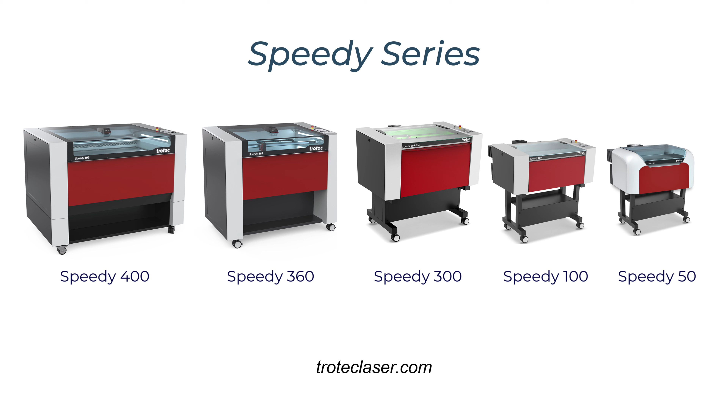This video will showcase 3 projects for the first-time operation of your Speedy laser systems. Project number 1 will create a simple design from start to finish directly in the Ruby software. Project number 2 will use free online design generators and image artwork combined in Ruby to create a fun, unique laser project. Project number 3 will use a design created in a third-party graphic design software to then open into Ruby and then laser process that design.

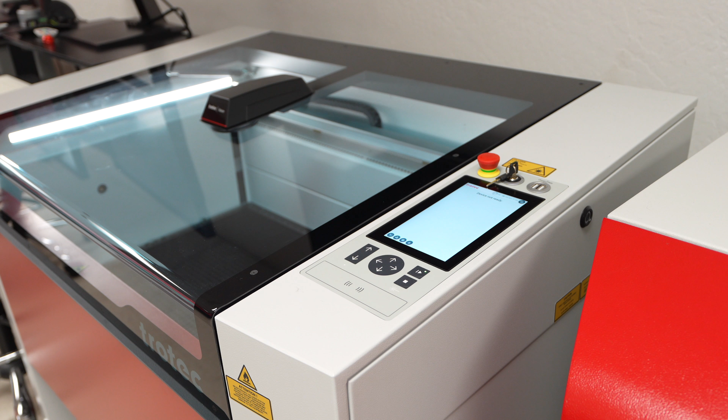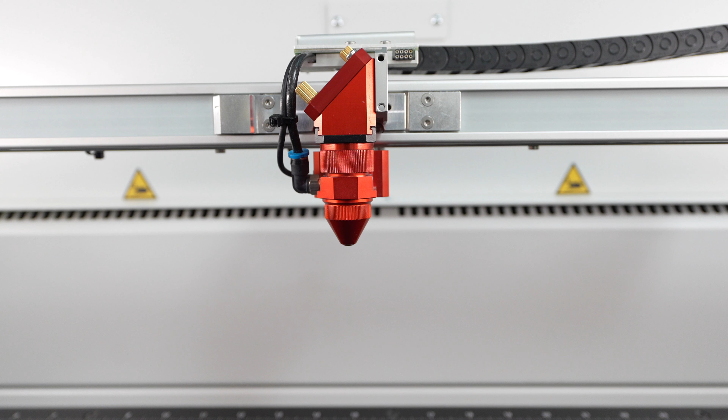First, approach your new laser machine, turn it on with the key or switch, and let it boot up and home. Use the arrow keys to move the laser focus head out to the center of the field. For the Speedy 300, 360, and 400, remove the small hole nozzle and replace that with the wide hole nozzle by unscrewing it to remove it and then screwing the new one in place. For the Speedy 100 and Speedy 50, this step is not necessary.

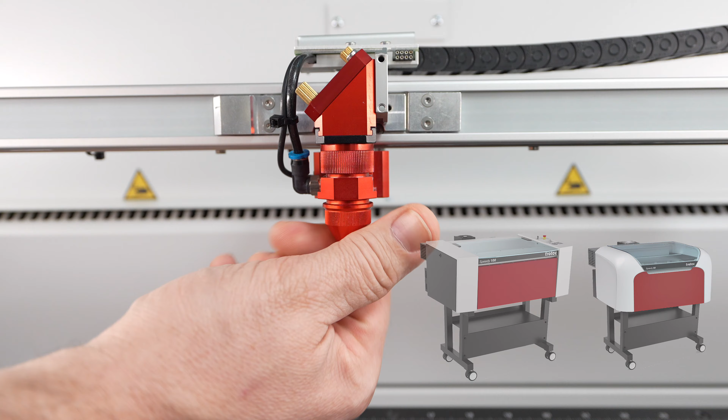The large hole nozzle is ideal for shallow surface engraving on plastics and acrylics, producing a flame-polished edge due to slower cooling of the material. The small hole nozzle is designed for cutting operations like wood that generate a lot of smoke, focusing the airflow to clear away smoke and gases. It is also suitable for engraving applications that produce dust and will be the default nozzle for most applications.

This first project will create a design directly in the provided Ruby software using a sheet of blue on white TroLase plastic shown here.

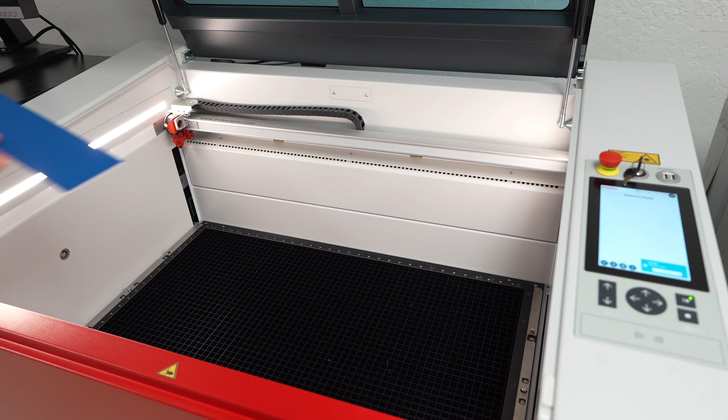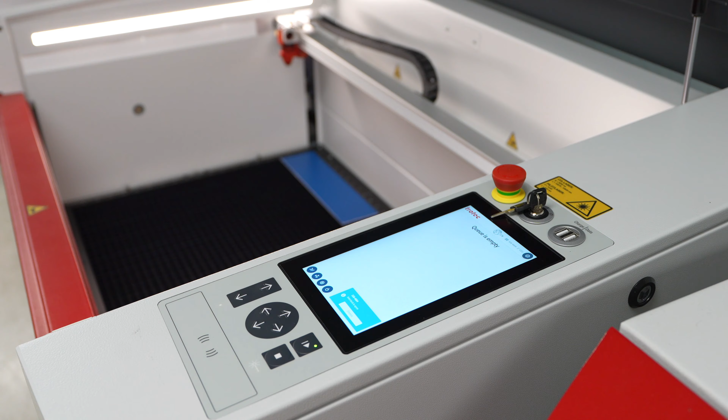Remove the protective film from a piece of this plastic, open the laser system, and place the plastic into the upper left side corner of the machine. Now, on the Speedy 360 and Speedy 400 machines, use the system arrow keys to move the laser head over this plastic. Then select both the up and down Z-axis arrow keys simultaneously to use the sonar autofocus to focus the laser system on the plastic.

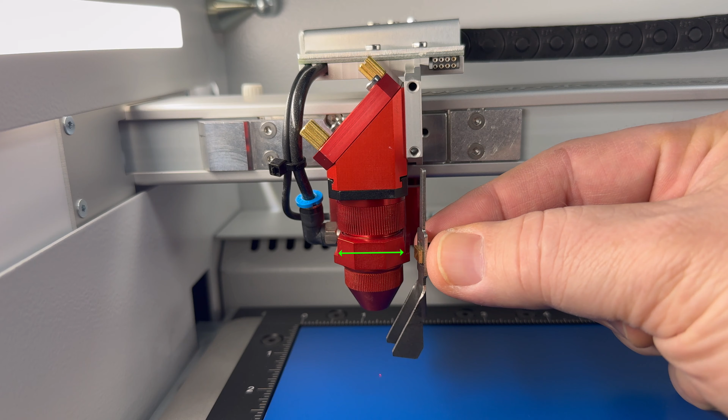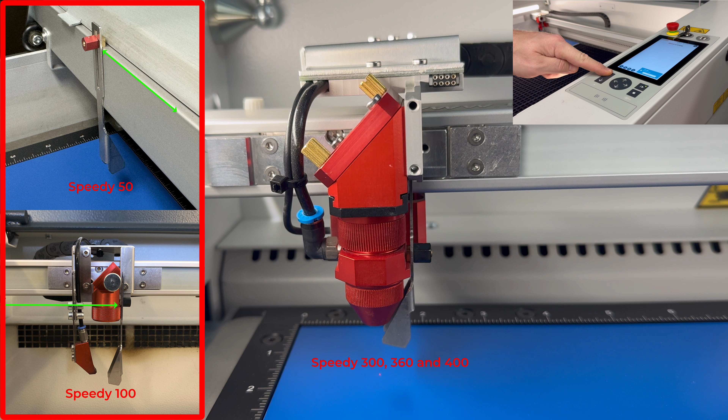Additionally, all Speedy machines can be manually focused using the provided focus tools. To do this, place the focus tool onto the left or right side of the focus head on the Speedy 300, 360, and 400 machines. The Speedy 50 and 100 are similar, as shown in the photos. Then, use the system Z-axis arrow keys to manually adjust the laser table height until the focus tool gently touches the material and slightly moves. Then remove the manual focus tool, and the system is focused on the material.

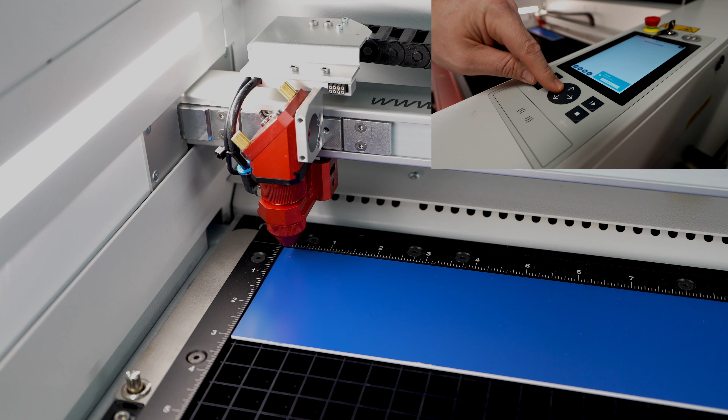Now, use the onboard arrow keys on the Speedy 100, 300, 360, and 400, and the computer keyboard arrow keys on the Speedy 50 to move the focus head to the desired start location on the material. Make sure to start the laser job slightly offset from the very edge of the material to produce a clean-cut part.

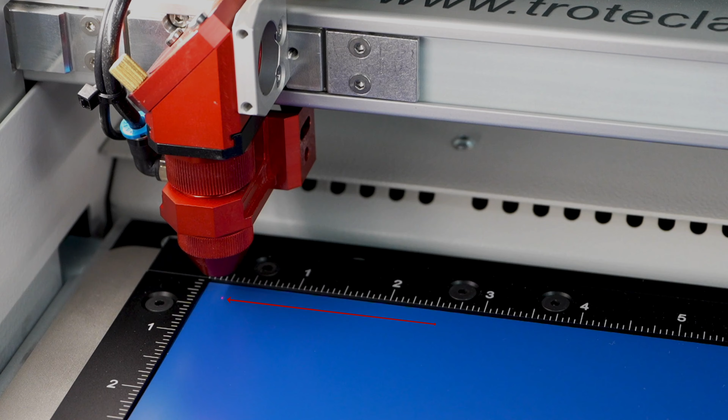Open the Ruby software on your computer system, tablet, or laptop. Select the second icon on the screen's top center to open the Ruby design screen. We will be creating an engraved and cut out nameplate in this example. In the design screen, select the rectangle tool and then drag out a rectangle.

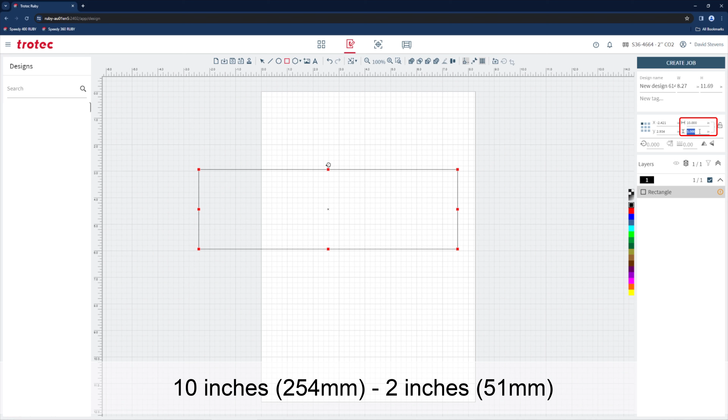On the right side, near the drawing dimensions, select the small lock icon to unlock the X and Y aspect ratio. In the drawing dimensions field, type 10 inches or 254 millimeters in the X dimension and 2 inches or 51 millimeters in the Y dimension to create a nameplate outline. Then select red on the color palette. This will change the size and color of the rectangle. Colors are used for a laser operation. A red line is the default color for a laser cut path.

Select the Fit to Design button on the top toolbar to resize the page to match this design. Select the small letter A on the top toolbar to add text to this design. Type out your name or desired text to be placed inside this rectangle. Click the selection tool on the top toolbar. Then, select a corner of this text and drag it out until you reach the desired size. While the text is selected, click the color black on the color palette to convert the text to black. The black color is the default color for engraving.

Now, select the text and move it towards the center of the rectangle until it automatically snaps to the center. Once satisfied with the design, select the Create Job button on the upper right side of the screen. This will bring this design into the Prepare screen.

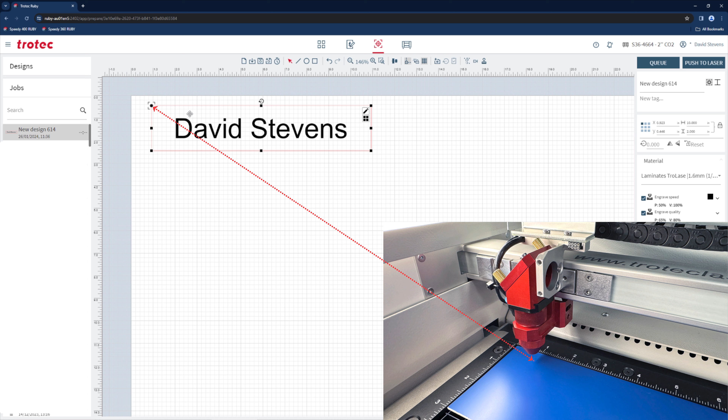On the Prepare screen, a small crosshair square icon will be seen on this field if the machine is turned on. This is a live reference of the exact location of the laser machine's red pointer that was positioned earlier. Select the nameplate design, move it, and snap the upper left corner to this cursor, representing the location of the laser red pointer.

If you have a Speedy 360 or a Speedy 400 system, you can turn on the Vision Design and Position Camera system by selecting the camera icon button and using the camera to position the graphic. This is in addition to using the red pointer. Select here to turn off the grid for a clearer image, then use the camera image to position the design onto the plastic.

Next, select the material that will be laser processed. This example will be laminates, TroLase, 1.6 mm or 1/16 of an inch. Once the material is selected, click the Push to Laser button on the top right side of the screen. This will send the design file that was just created, positioned on the field with the selected material parameter, to the Produce screen, also known as the queue of ready to process laser files.

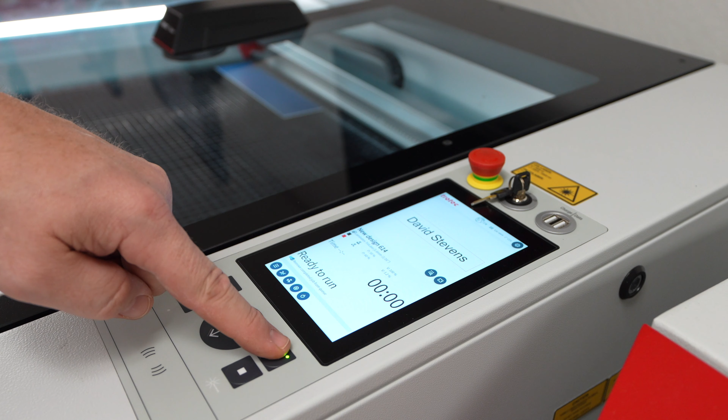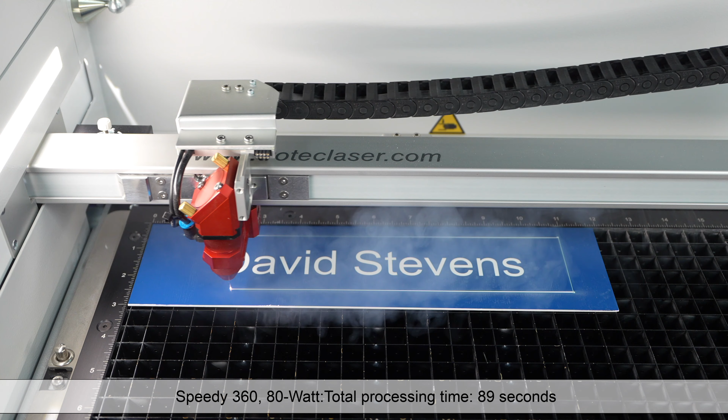Select the Start button on the laser machine and watch the laser automatically engrave the black text shown here in a time lapse. Then cut the plastic with the red line. The actual processing time on a Speedy 360 80-watt laser was completed in 89 seconds. Open the laser and use a cloth to wipe away any dust. Then remove the completed nameplate from the laser.

For the second project, we will process a solid wood sheet. Because thicker woods produce more heat and debris, the more commonly used higher pressure small hole nozzle is needed. Remove the wide hole nozzle and reinstall the small hole nozzle by unscrewing one and screwing on the other. This step is not needed on the Speedy 50 and Speedy 100 systems, as the air comes in from the side, and these models do not use nozzles.

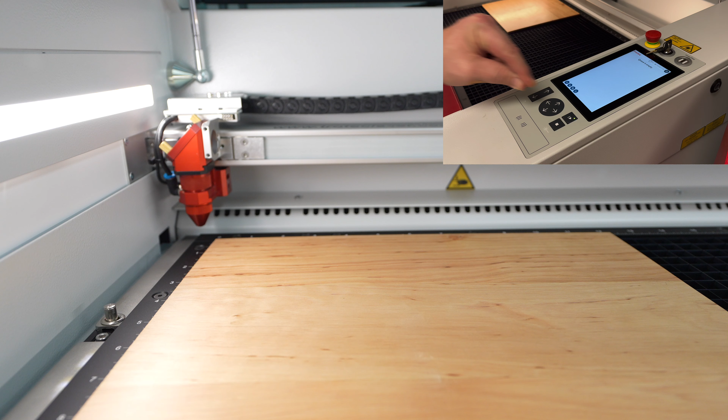Place the wood into the laser machine's upper left corner and again, focus the laser using the sonar focus or the manual focus tool, depending on the Speedy laser machine you are using. Please note that anytime a new material thickness is used, the laser will require it to be refocused to maintain quality. Once focused, close the laser lid and open up the Ruby software.

For this project, I will create the design online by first going to makerdesignlab.com, then clicking on Tutorials and Tips, then selecting Online File Generators for Laser Cutting, and then scrolling down past many other useful online laser generators that can be used on your laser system. Generators for creating boxes, templates, gears, mazes, rulers, and nesting, until you see the Jigsaw Puzzle Generator. Select this generator and open it.

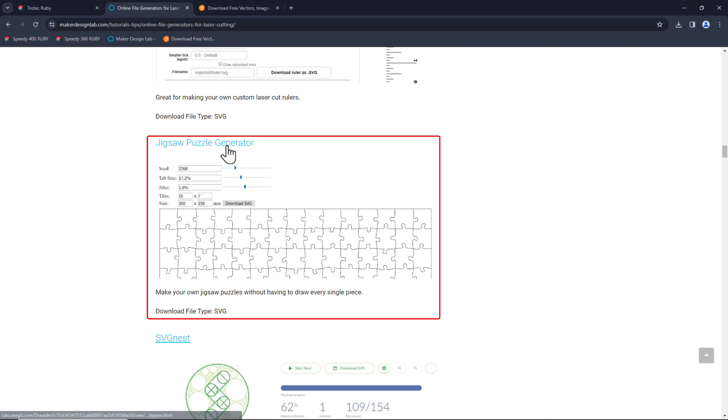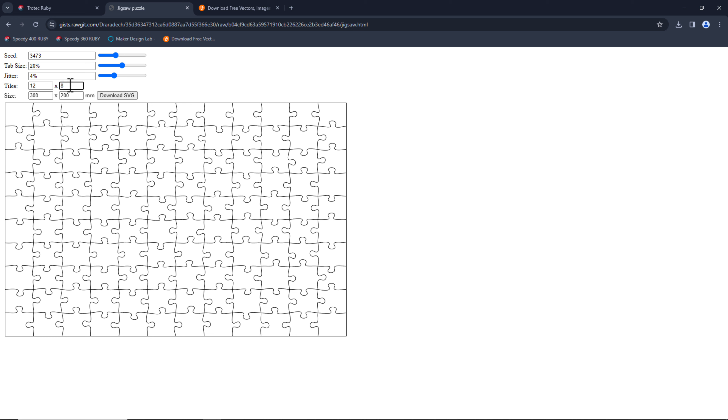Within this generator, you can adjust the look and size to your desired needs by sliding these sliders and typing in the dimensions and number of puzzle tiles. Once satisfied, select the Download SVG button and the Laser Ready file will automatically save into your Downloads folder.

Next, I will use Vecteezy.com to find a high-quality, free, and copyright-free graphic to engrave into the puzzle cut file. For this example, I will search for the keyword Cat Doodle, select Free License on the left side, and scroll through the files until I find the perfect design. Black and white files work best, but a color image will also work. Once a design is located, select the Download button. The file will be saved into the Downloads folder on your computer.

Open Ruby and select the Manage screen. Select the Downloads drop-down directly in Google Chrome or Microsoft Edge, or from the Downloads folder on your computer, and drag the puzzle's SVG file and the zipped file from Vecteezy directly into Ruby, and the files will be extracted and opened in the list of designs. To start the project using these designs, first select the jigsaw.svg file from the Manage Design list to open it into the design screen.

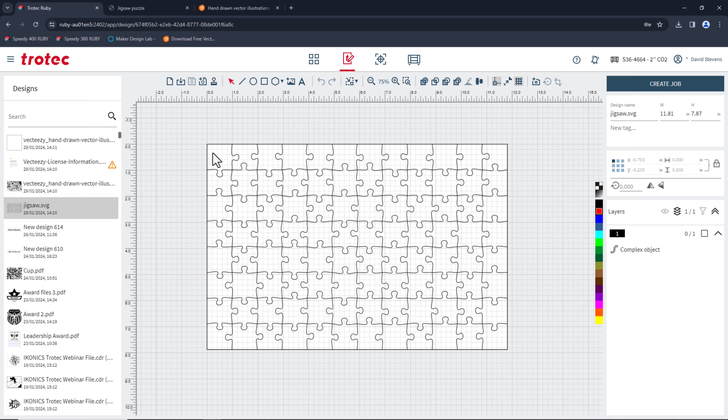Select the puzzle design, then select red from the color palette to convert the puzzle to a red cut path. Then select the Create Job button to take this puzzle into the Prepare screen. Adjust the puzzle file slightly onto the field, then select Designs on the top left side of the screen to add the cat doodle design to this puzzle. Select the small arrow next to the cat doodle file downloaded from Vecteezy to add this design to the Prepare screen. Scale this design and adjust it to fit within the puzzle outline.

The file is filled with white, but the puzzle cut lines will still cut even though the white covers up the red cut lines, as part of the cut lines are not seen in this example. Move the laser pointer on the machine to the corner of the material and then select and snap the design to the pointer location.

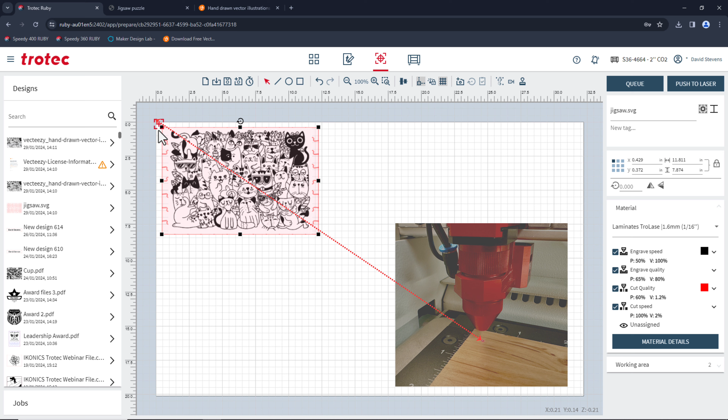If you have the overhead camera on the Speedy 360 and 400, you can use this camera to position it in place or use only the red pointer to position the design. Select the wood from the materials list. This example will be processed onto 3/16 of an inch or 5 mm of solid cherrywood.

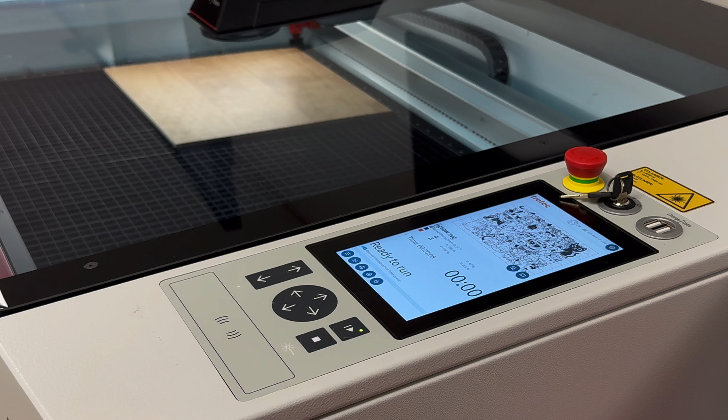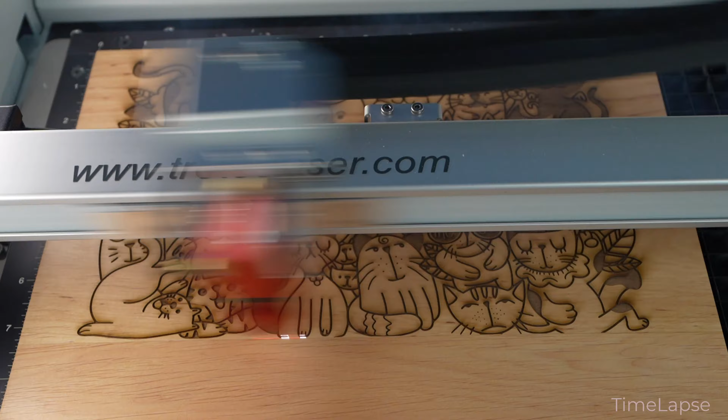Select Push to Laser and the file will go into the Produce screen, ready to be laser processed. Press Start on the laser to start the laser processing. The laser will engrave the black image into the wood and then cut the red puzzle path. The total time to process this 12-inch by 8-inch or 300 mm by 200 mm puzzle design on an 80-watt Speedy 360 machine was 19 minutes and 40 seconds.

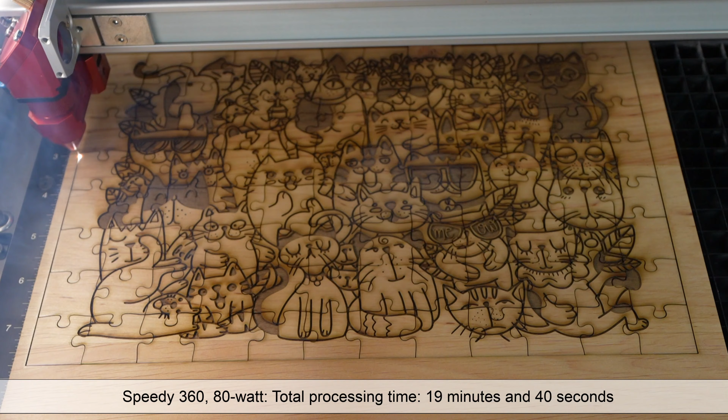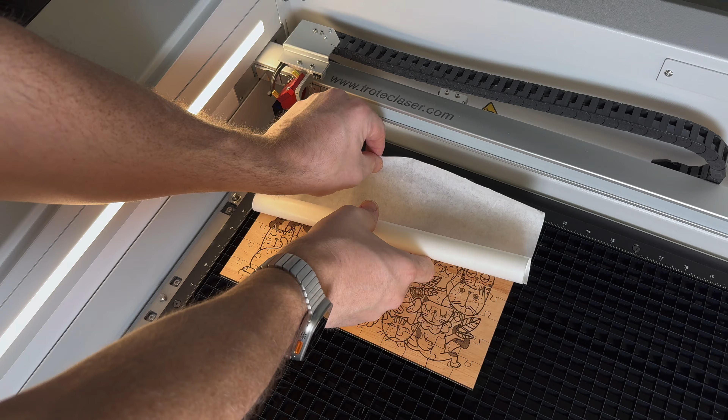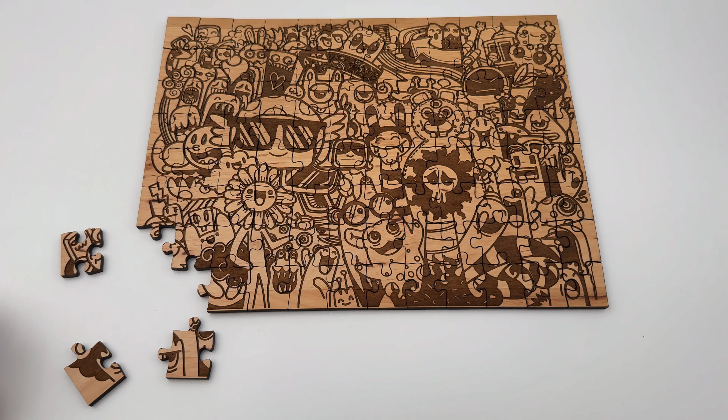Once finished, use a damp cloth to wipe away the residue in place until it is fully clean. To remove the puzzle intact, use a sheet of transfer or application tape over the puzzle pieces to remove the puzzle in its entirety at once. You can then wipe the back side of the puzzle as the tape is holding it together, then remove the tape for the finished result. This unique engraved cat image puzzle was created into solid cherrywood with stunning results using easy-to-use online generators and designs combined together with the Ruby software.

I will use this 1/8-inch or 3 mm bamboo veneer MDF wood sheet in this third and final project.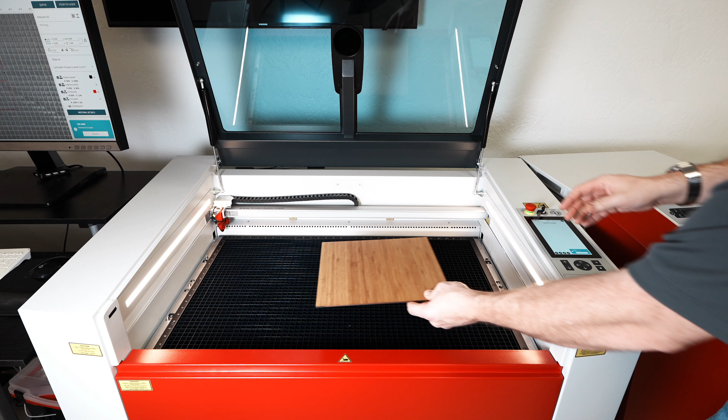Place the sheet into the laser system center field and focus the laser using sonar or manually focus the machine on the material. This final project will showcase how you can use your favorite graphic design software to create the designs for the laser. Most common graphic design software will work well with a Trotec laser and Ruby if it can create vector-based artwork. Vector-based software is needed to utilize the full operational capabilities of a Speedy laser machine. The design will be compatible with the Ruby software if the graphic design software can generate or convert to one of these shown formats.

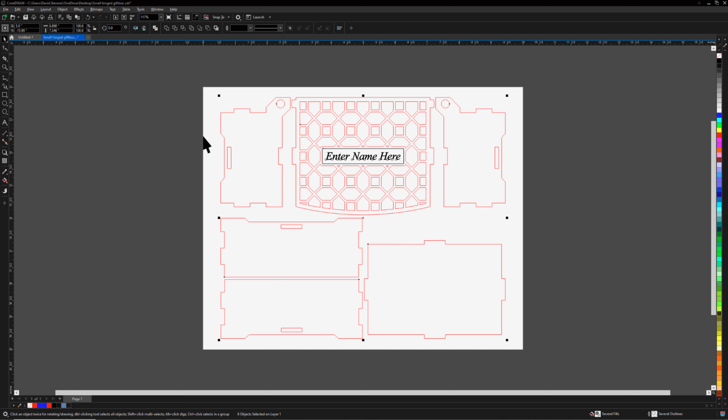This example will showcase a file previously designed using the popular CorelDraw software. This example box file has been created in CorelDraw using red vector cut lines with black text. Once a file is created in your design software, save it or export the design, converting it into one of the Ruby-compatible formats. Open the Ruby software. Since the design is ready to process, go directly to the Prepare screen and then drag the compatible design directly into this screen from the Save folder, or in this example, the file was saved on the computer desktop.

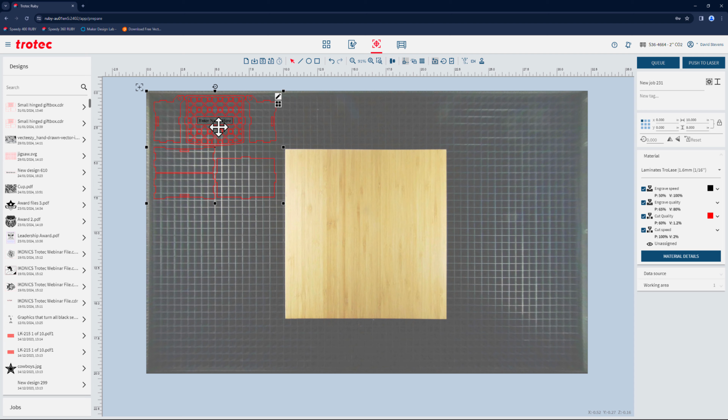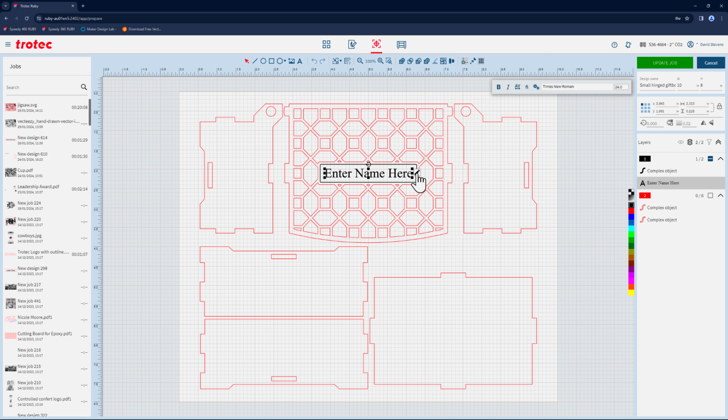Place the design over the wood using the overhead camera or red pointer. Even though the design was created in another design software, it can still be edited in Ruby. To edit it, select the small pencil icon at the top right side of the design to edit this design in Ruby. In this example, I want to change the text to personalize it. Select the text and select the pencil icon to edit the text. Type the new text, then select Enter. Select the text and drag it till it snaps to the center of the box. You can select Fit to Design if you like.

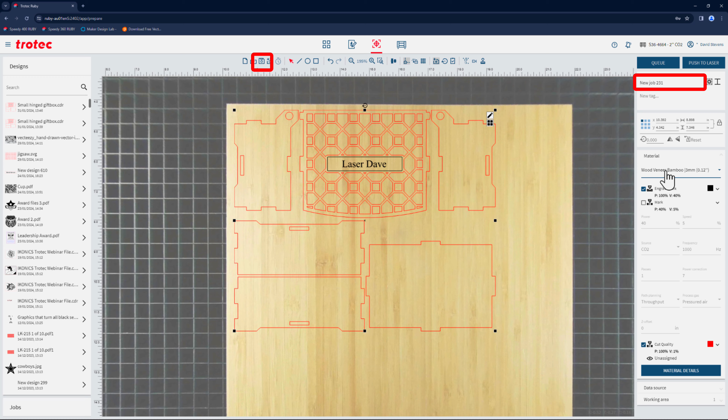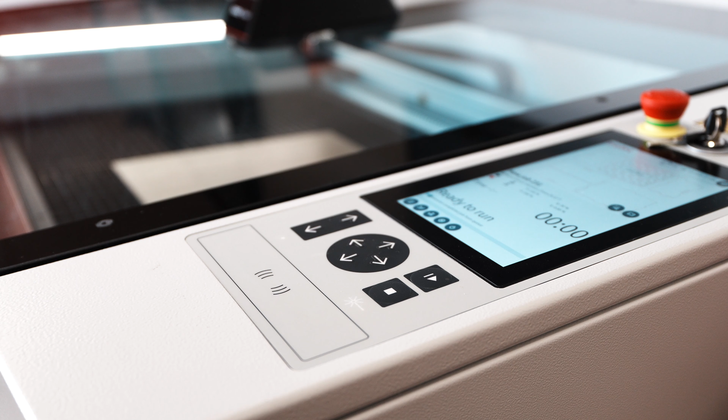Then click the Update Job button on the upper right side of the screen to take the edited design back into the Prepare screen. Select material from the materials list. This example will be the wood veneer bamboo. Then save the file. Use this location to name the file. The file is ready to process. Select Push to Laser. Push the Start button on the laser machine to start the job. The laser will engrave the black text and then cut the red vector cut path.

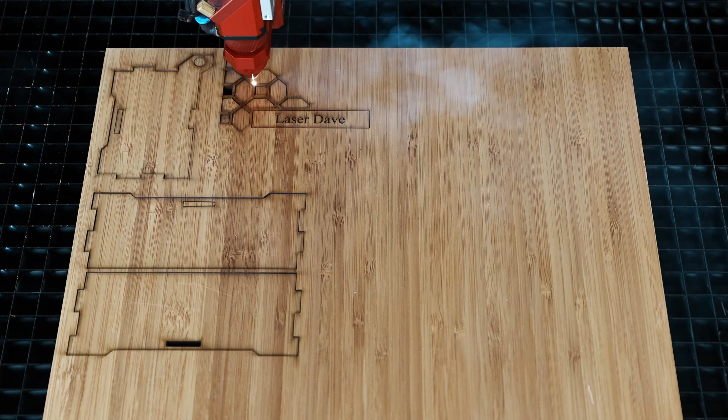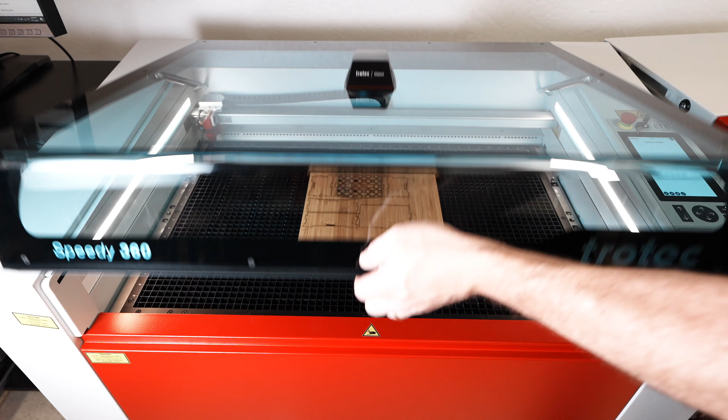This example was engraved and cut into this bamboo veneer MDF wood in 3 minutes and 27 seconds with an 80-watt Speedy 360 machine. Once finished, open the laser, wipe the wood surface with a damp cloth in place. Place a piece of transfer tape on the box parts, hold them together, turn the sheet over, wipe the back side, and then remove them from the laser. Transfer tape is an ideal product for removing and cleaning many laser cut parts simultaneously.

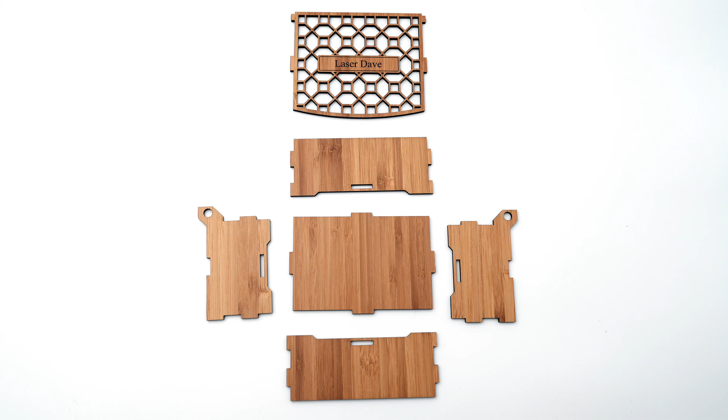Remove the tape to remove the parts from the wood sheet, then press the box together for a stunning finished bamboo wood gift box.